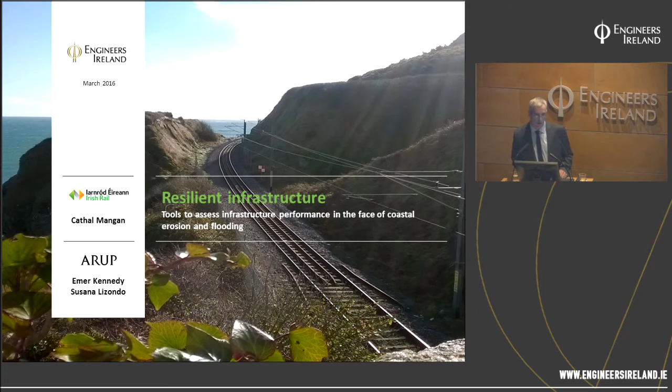And as I say, the impacts on the infrastructure can be quite substantial, no more so demonstrated than in the last winter period. We'll talk about that in a moment.

So just in general, the context of the presentation is straightforward. I'm going to give a little background to the project and an introduction to the context in terms of Iarnród Éireann and the infrastructure involved. Then I'll hand over to Emer and to Susana, who will talk in more detail about the two specific pieces of research done, around the development of tools for supporting decision making around coastal erosion and flooding, and how those tools help in strategic decision making and in things like investment and prioritization. The presentations will also afford time for conclusions and discussion afterwards.

So generally, a bit of background to the project. It was developed and evolved from an Arup-funded, internally funded mechanism, and was carried out in collaboration with Iarnród Éireann.

Specifically, the aims of the project were focused on two areas of research: coastal erosion and flooding. The objectives were to develop tools to help assess vulnerable areas on the network with respect to coastal erosion and flooding, and to support our own decision making in terms of those.

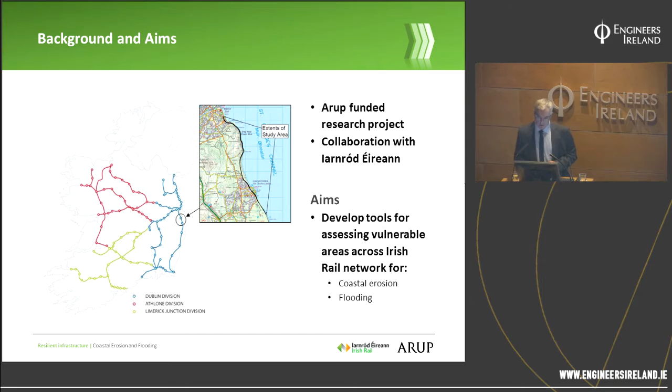The extent of the study picked a representative area between Bray and Greystones, an area significantly prone to the impacts of both coastal erosion and flooding, as we've seen over the last number of years. The objective of the scope was that we could use this as a test area, with the aim of applying the tools we develop to other areas of the rail network.

So a brief context to the project from an Irish Rail perspective, as the infrastructure manager. When we started scoping the projects in detail and developing them, we quickly came to the conclusion of the value of coastal erosion and flooding as areas of research worthy of developing support tools.

That was early in 2015, where we defined the detailed scope. We then had the winter of 2015 into the new year of 2016, where there were significant impacts, not just on railway infrastructure, of course, but only a few weeks ago we remember the impacts on infrastructure throughout the country. Irish Rail was significantly impacted by that as well.

So I'm just going to illustrate that with images of the damage caused on our infrastructure, and how that lent itself to the development of the tools in the research projects we undertook.

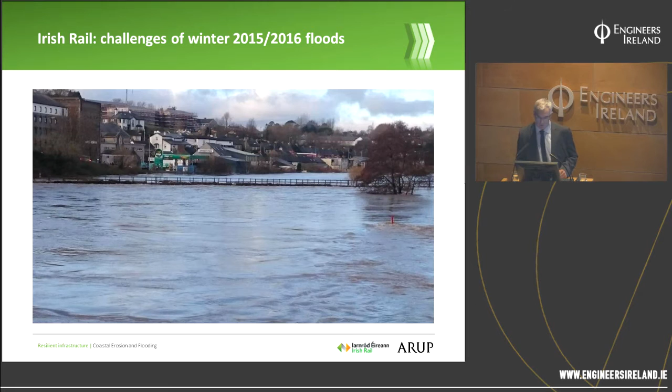So that was particularly important around this asset, not only from an operational point of view, but also from the benefit that can be accrued in terms of development of decision support tools.

There's another picture of Enniscorthy, again showing the extent of the flood levels, and you can see beyond it the further extents where the water levels are not far from the top of the platform level. Again, it highlights the severe extent of the flood events over the winter and Christmas and New Year period recently gone by.

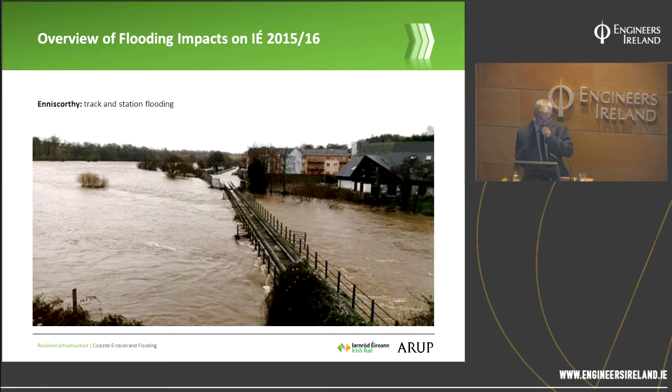Another feature of the flood events was not just the sustained nature of them—and it was very sustained and relentless over a number of weeks—but also the types of flooding we were exposed to, ranging from fluvial, pluvial, to coastal erosion. We seem to get all impacts throughout the network at various locations and of various types.

One of the things very evident from the winter period just gone by was the rate of erosion was absolutely huge, and we've noticed over years that it seems to be continually increasing at an accelerated rate. In fact, in some coastal areas along the east coast, we've lost up to 32 metres over a 4-year period. So it really is a major issue for us, more so exacerbated by the winter period.

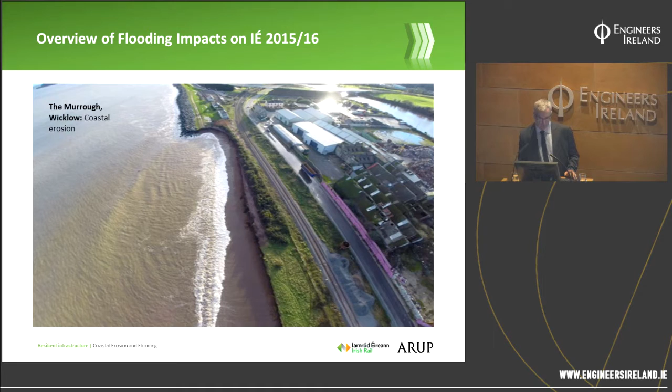One of the most notable aspects was how sustained in nature and significant these impacts were. So while the scope of the projects and research were being developed, we decided very early on that they were relevant and good topics to invest in. I think that decision was further compounded by the winter period just gone by, which really demonstrates that coastal erosion and flooding are huge and hugely impacting issues for us, and demonstrates the value in the collaborative research we've undertaken with Arup.

And hopefully now we can demonstrate the value of the research itself. Emer and Susana are going to take us through the two specific projects of flooding and coastal erosion. Just before I hand over to Emer, I do want to express thanks to Arup in terms of the development of this collaborative research.

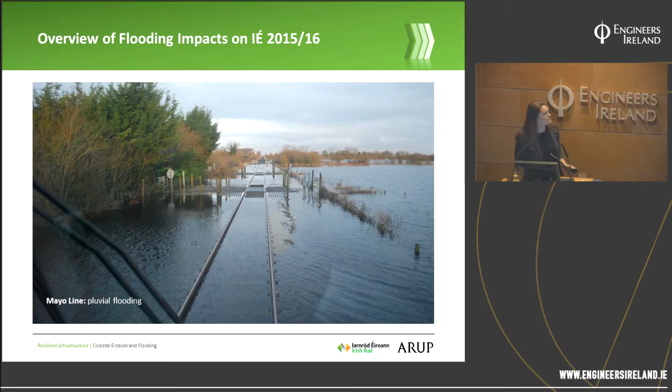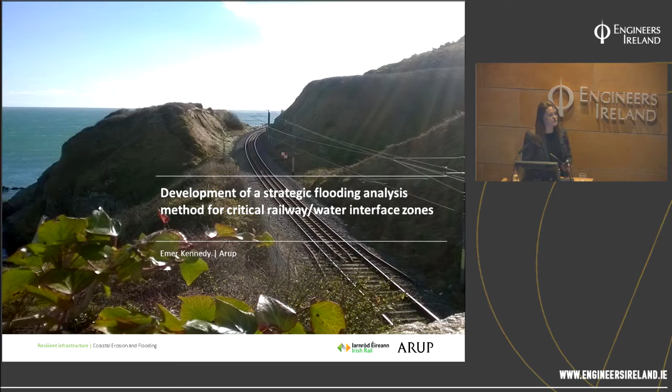Good evening. My name is Emer Kennedy. I'm a senior water engineer in the Arup water team. My role in this was to oversee the research into the interface between external flooding and the rail corridor.

For this project, we looked at two aspects: flooding from the external catchments and also flooding on the rail corridor from rainfall events. As Cathal mentioned, we chose the study area of Bray to Greystones. In choosing this area, we got together with the coastal research team and Irish Rail to figure out what study area we could apply the same study to, so we could compare results at the end. We also wanted a research area representative of the majority of the Irish Rail network throughout the country. This catchment had mountainous areas around Bray, then lowland agricultural area, before ending in the urban area of Greystones.

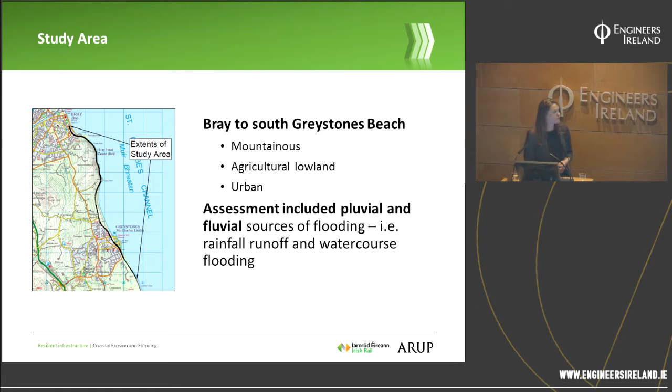We looked at the pluvial and fluvial sources of flooding and how they interact with the rail corridor. The aim of this project is a high-level assessment to create a tool to rapidly assess large sections of the rail corridor, and from this prioritise where further investigation is needed. In broad terms, the research steps were: the desktop study, which informed our targeted site visit, followed by a hydrological and hydraulic assessment. We then analysed our outputs and presented them in a colour-coded risk matrix format, and compared this with the research conducted by the coastal research team. I'll go into each of these in more detail now.

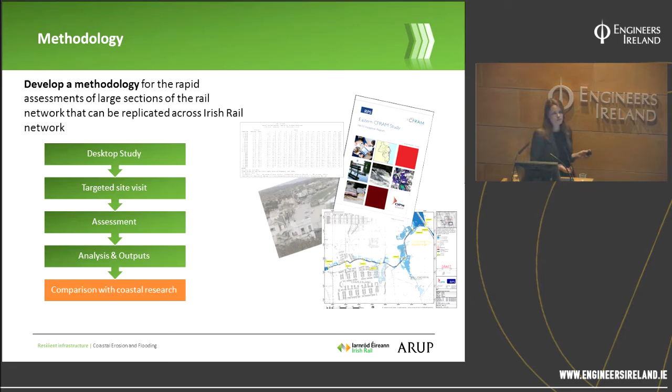For the desktop study, we first reviewed publicly available information, such as the Office of Public Works Catchment Flood Risk Assessment and Management Study, which is available online. We also looked at historical information from the OPW Flood Maps website, then the Met Éireann rainfall data for both Bray Head and Greystones Beach. Even though it's a small catchment, we needed to get a feel for the difference in rainfall patterns between the mountainous Bray Head region and the low-lying Greystones area.

We also received a large body of data from Irish Rail, including culvert inspection records, topographical survey, and survey of existing utilities within the rail corridor. We then looked at the OSI mapping data, which you can see on screen here. From this, we were able to quickly map the external catchments and determine where we'd assume there would be a point inflow into the rail corridor. We compared this with the Irish Rail inspection records and culvert data to see if it correlated with culverts on the ground. More often than not it did, but we found a couple of instances where we needed further investigation, so these were high priorities in our site visit.

We also looked at potential flood mechanisms, which was one of the main inputs into the targeted site visit. As part of that, we reviewed the topographical survey provided by Irish Rail, identified low points in the rail corridor, and identified these as potential sources of ponding. We then mapped all of this data, as you can see here on the left, and this was what we used for going to site. With this method, we were able to cover quite a large section of the rail corridor in a brief amount of time—about 2 hours to review the 6 kilometres of the study area.

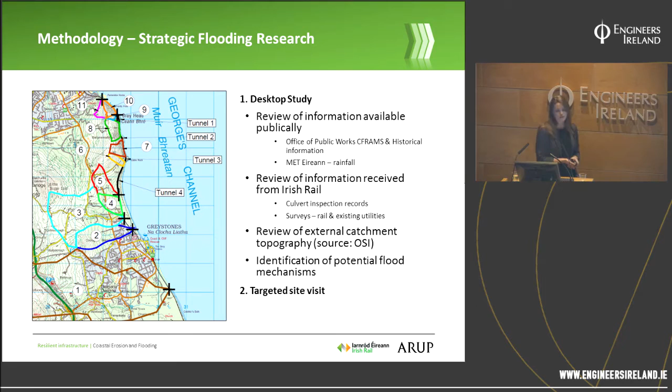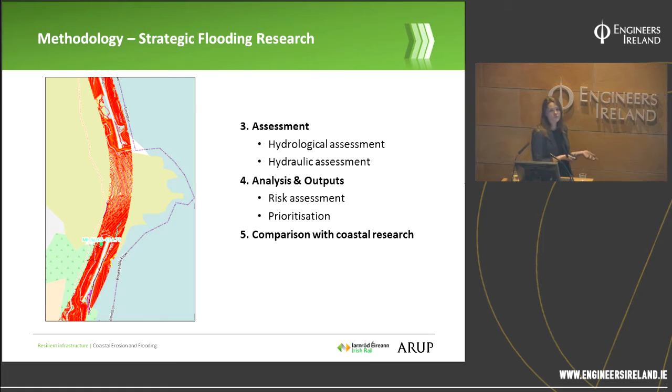Here's a screen grab of some of the survey. Irish Rail actually maintained quite an extensive amount of topographical survey, covering approximately 50 metres width of rail corridor. I'll go into this in more detail shortly, but this was a key input into our pluvial analysis of rainfall runoff in the rail corridor itself.

First, for the assessments, the hydrological assessment of the external catchments. As I mentioned earlier, we looked at the OSI mapping to look at the topography of the external catchments and determine where those point inflows were.

We then came up with our assessment criteria by a desktop review of comparable studies and came up with our criteria of a 1 in 10 year ARI event and a 1 in 30 year ARI event, and finally a 1 in 100 year being a more critical storm event.

We estimated the runoff from the external catchments based on 3 methods depending on catchment size. This is using the Agricultural Development and Advisory Service for catchments less than 0.4 kilometres squared, right up to the FSU web portal for catchments greater than 25 kilometres squared.

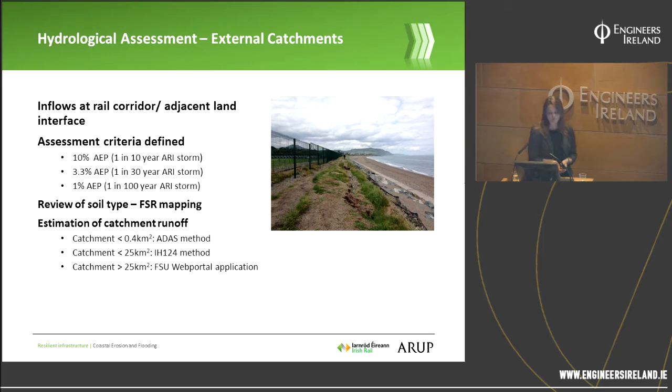From this, we worked out and had a look at the culverts that we had data on to assess their performance. Again, this is a high-level assessment of the culvert performance based on the CIRIA guidance.

The criteria for pass in this instance was the headwater level upstream of the culvert. If it was above the soffit level of the culvert, it warranted further investigation. At this point, we compared the headwater level with the top of rail level.

We also compared this with the results of the Floodflow analysis, which was our assessment of the rainfall profile over the rail corridor. In some cases, this indicated where there could be ponding along the track, but it also showed where there would be ponding adjacent to the track. For this study area, that is generally on the land side of the rail corridor. Again, this generally did correspond with where we had identified the point inflows.

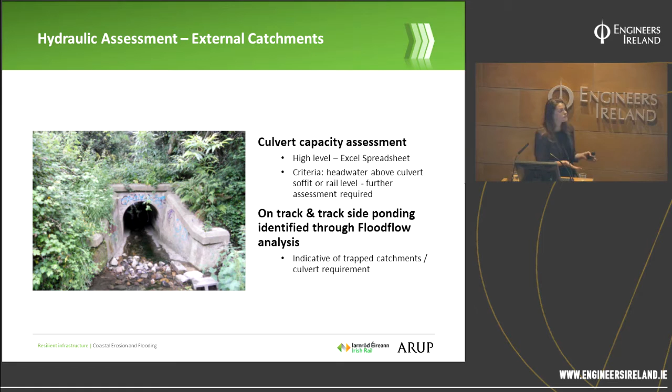So this is a typical output of that assessment of the culverts, just giving you an image of the headwater level relative to the soffit or the rail level.

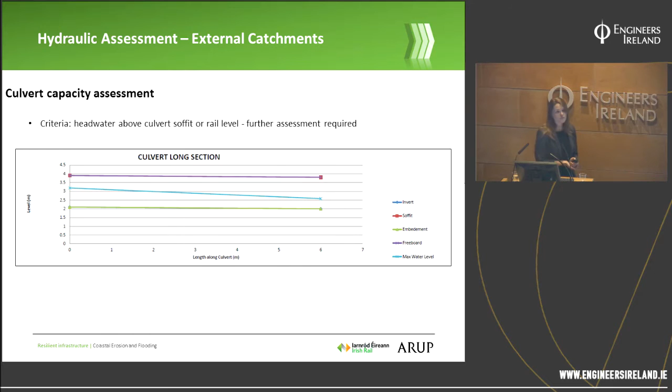Now the rail corridor, as I said, there were 2 aspects: external drainage, which was based on the OSI mapping and looking at the point inflows and sheet inflows. The other aspect is looking at the rainfall, the impacts of rainfall directly onto the rail corridor itself.

So for this, we prepared storm intensity data. We received storm intensity data from Met Éireann and prepared our IFD curves. We also considered climate change and factored it up by 20%.

We then used the Floodflow, which is a suite of the microdrainage WinDes software, where you can apply synthetic rainfall over a topographical area and assess how that rainfall behaves, where it ponds, and at what frequency it ponds and severity. One aspect of this was we had to determine the critical duration of the storm.

We decided to choose a baseline critical duration to make the studies relatively quickly comparable, so that if you have an impact in one area, it could be quickly compared to another area, allowing prioritization to be applied. In general, we found that some of the internal rail corridor catchments were quite long, so because of this, we decided a 1 hour duration would be appropriate for a baseline study.

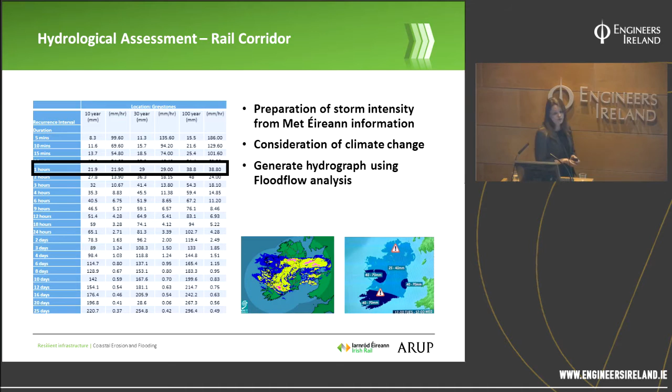The low impact ponding of 100 mil doesn't necessarily translate to visually 100 mil of ponding above rail level. This is more indicative of where the water will filter through the ballast and sit on the subformation. It's low impact because it's not going to cause rail stoppage, but it is an impact because if it's a higher frequency event over a longer course of time, this can cause damage to the subformation or cause an ingress of fines into the ballast.

The higher impact then on the other end is a 600 mil depth. We looked at the void ratio and the typical depth of ballast in the Irish rail network, and took this to translate to about 100 mil above top of rail, and this is enough to trigger a rail stoppage. So this would be seen as quite a severe impact.

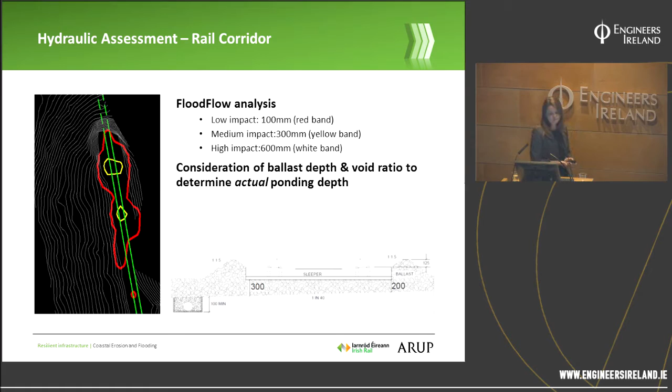So from all of this, the risk ranking is quite intuitive: if it's a more frequent event with a higher depth of ponding, it will be considered a very high priority. Then if it's a less frequent event with not as much ponding, it's a lower priority.

In terms of how the culverts interact with this, as I said, we generally found where the landside ponding adjacent to the rail corridor from the flood flow analysis happened, it generally coincided with the culvert. We would look at that culvert and that ponding location and determine if the culvert was performing. If the culvert wasn't performing on our high level assessment, then we would definitely trigger further investigation.

There was also an instance from our site walkover where we couldn't immediately find the culvert. That would automatically trigger a high priority assessment because we couldn't carry out a proper assessment of it. But further investigation could indicate that the culvert is in place.

I'll go through some of the risks Cathal covered earlier, but more specific to the impacts of ponding. The severe impacts would be rail stoppage, while the lesser impacts could be longer term damage such as ballast fouling.

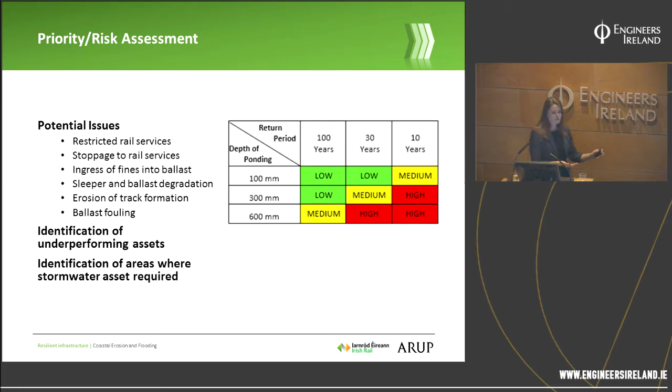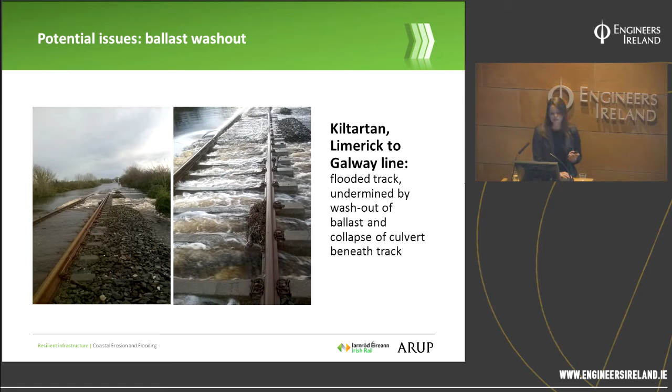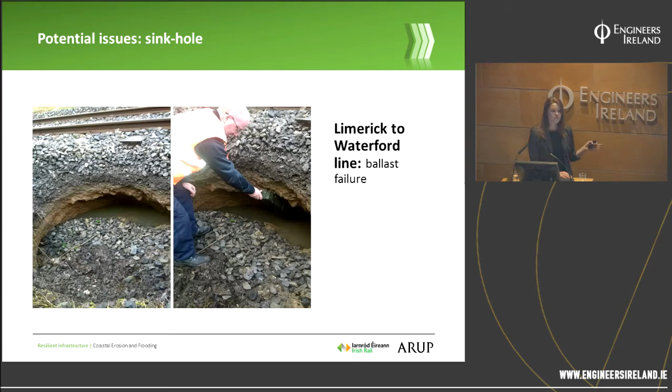This is basically ballast washout. This is a sinkhole on the Limerick to Waterford line. This could be caused by a low level of impact over a longer duration, ultimately causing the subformation to fail, and this would have quite a severe impact.

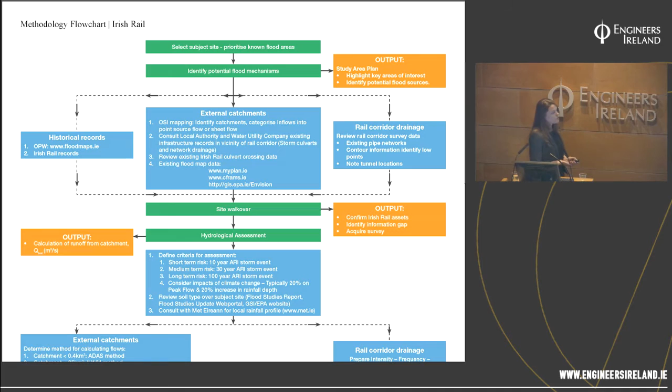This was of both the external catchment and the internal rail corridor. The external catchment looked at different methods of estimating your Q10 to Q100 flow rates, and in the internal area, it looked at the intensity, frequency, duration curves and applying a factor of climate change.

The hydraulic assessment then, for the culverts or bridges, just used CIRIA guidance, giving consideration to your upstream and downstream boundaries such as tidal influences. For the rail corridor drainage, as I've described, we used a flood flow suite from Microdrainage.

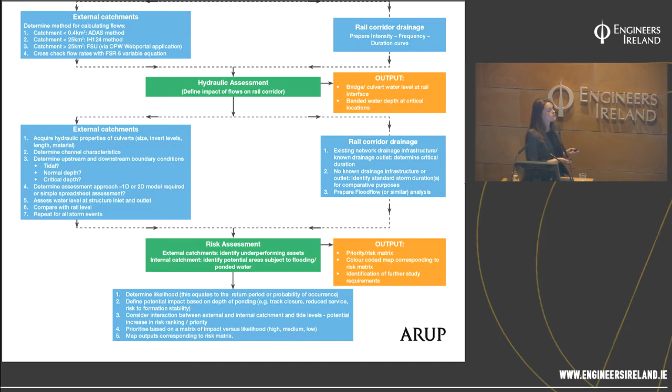Finally, from all of this, we compiled a risk assessment and graphical outputs. The conclusions from the study were that we were able to identify areas where more research would be required as a higher priority. We found that an asset register recording information specific to a drainage engineer or someone looking at flooding impacts would be valuable. This is just a quick sample on the bottom.

The Iarnród Éireann GIS database proved to be a very useful source of data. They have a huge wealth of information in-house. However, we found there could be some changes to make it slightly more user-friendly, or to contain more relevant data specific to that culvert. We'd also recommend that this be applied on future assessments based on the methodology flowchart presented earlier.

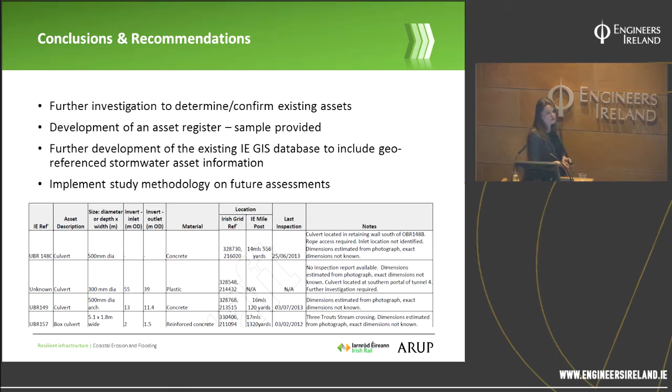Good evening. My name is Susana Lizondo. I'm a senior maritime engineer working with Arup in the maritime group. I'm going to describe the coastal research that we did in collaboration with Irish Rail.

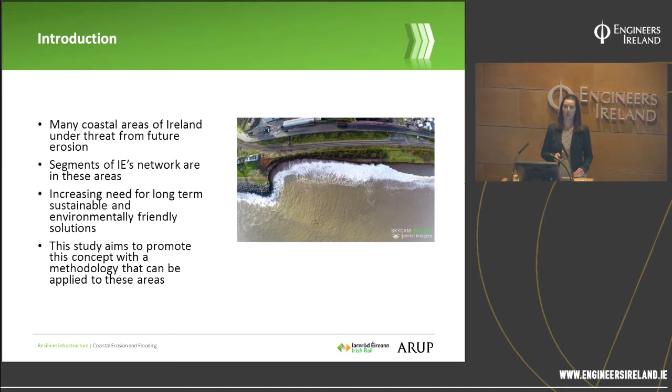At the same time, we have the need to assess more environmentally friendly solutions for these kinds of coastal problems, and we should aim to promote other kinds of solutions.

We can see in the image the big damage which happened, and the progression. You can see the importance of that sudden slide which happened in a very short period of time. In this case, the failure happened beside an existing revetment, which is a typical situation in coastal engineering, where the adjoining area is very soft, and at the end of your revetment you have a point of failure.

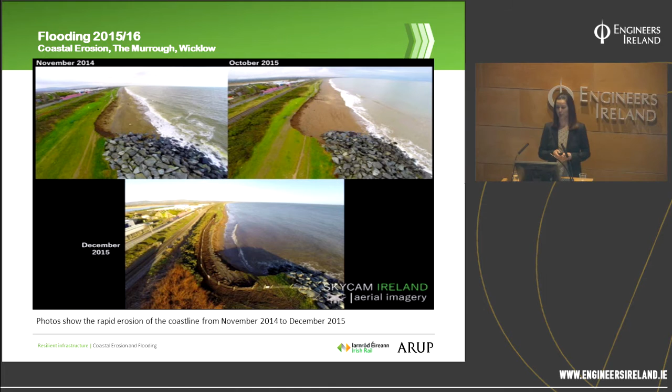The methodology we followed for this study consisted of different stages. First, we collected all the existing data around all the areas that Irish Rail provided us with. Then we did a workshop with Irish Rail and with our experts - railway experts, geotechnical experts and flooding experts - and we tried to define which would be the best area to focus the study on.

We decided that the area, as Emer was mentioning before, would be from Bray to Greystones, South Beach. After that, we did a couple of site visits with our geotechnical experts and then the maritime experts. We assessed all the information compiled in both site visits, previous studies, and our own research, and then we came up with the assessment.

As Emer just mentioned, our area extends from Bray to Greystones, South Beach. The reasons from the coastal point of view to select that area are that this area is plenty of coastal assets which need to be protected, and also that Arup had extensive knowledge of this area because we have done so many projects here in the past.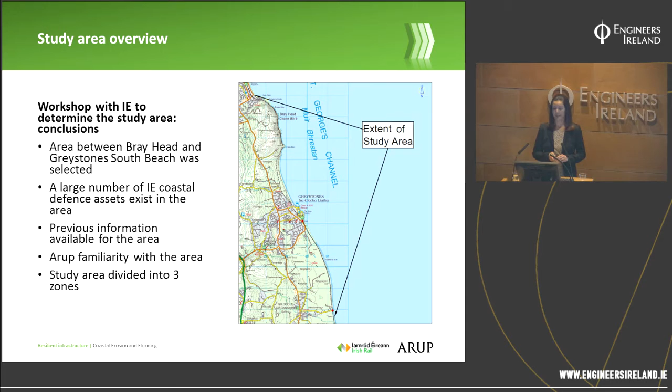So then we proceeded with the study. For the study, we divided the area into three different areas, according to their coastal features. The first area would be Bray Head, which is a rocky headland. This area had many troubles in the past, including big important geotechnical failures.

As you can see in the image, that's a redundant tunnel which is not used anymore. This area has a number of coastal assets to protect, and it was upgraded in 2002, where a number of revetments were upgraded.

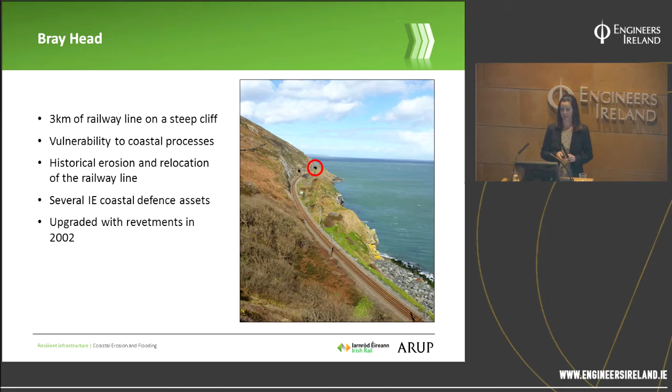Next area is Greystones, North Beach. We can see in that image one line showing the predicted retreat for the year 2050. This line and image comes from the Irish Coastal Protection Strategy. We can see that for that year, the railway line, which is actually located quite far from the coastline, will be affected. It's important to mention that this study did not take into consideration climate change.

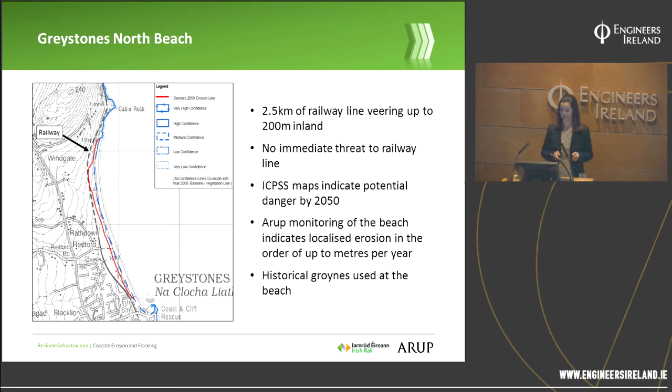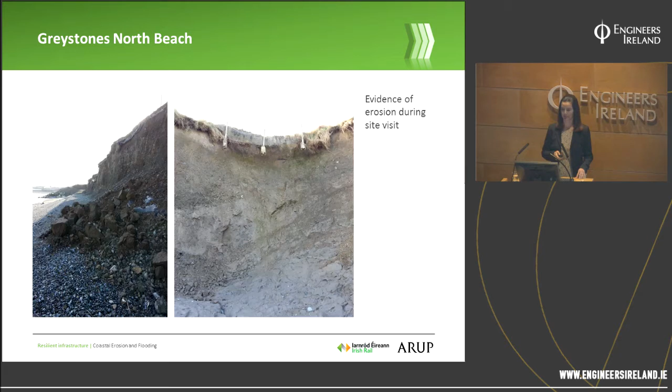Then Greystones South Beach. In this area, the challenge is that the railway line is really close to the seaside, so it's subject to both overtopping and coastal damage. This part of the railway line was already relocated in 1912, and right now it's facing some overtopping, as I just said. The Irish Coastal Protection Strategy also indicates some predicted coastal retreat in this particular area.

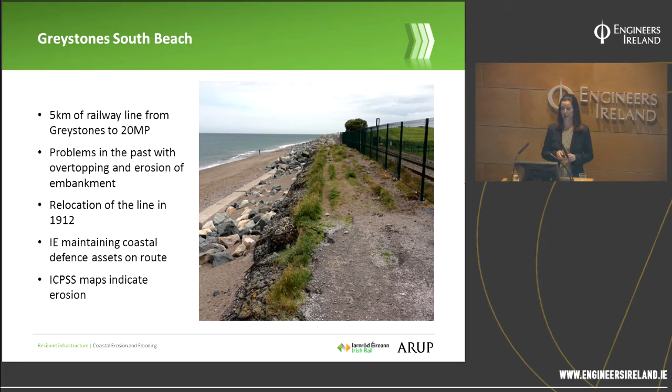Then we were talking about climate change, so in this image I'm just trying to summarize the key effects and how exactly climate change is likely to affect our coastal areas.

If you look at the image coming from the sea, you can see that sea level rise is likely to bring some increase of storminess. That means we are likely to have higher wave heights and more frequent ones. That increased wave action is likely to cause further erosion of the coastline, and the levels of the beach and seabed go lower, which will also accelerate the wave action. All of that will lead to increased coastal erosion, which is a risk for the railway line.

Coming from the land side, we can see that climate change is likely to bring more erratic and more frequent rainfall, which will lead to increased weathering and more likely landslides. So the risk to the railway line will be affected from both sides, land side and seaside.

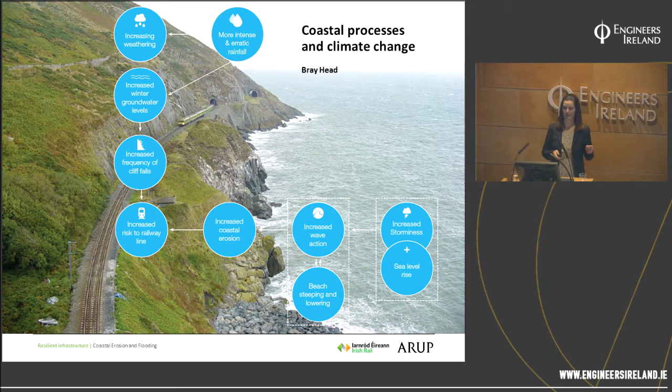We can see a similar situation for the Greystones North Beach, which will be our next area. In this case, the difference is that the cliffs are much softer because they are made of clay and sands, but the situation is very similar. So we can see the risk coming from the seaside and also the land side.

Finally, for Greystones South Beach, the situation again is very similar, but in this case climate change will bring direct effects on overtopping and increase the overtopping rate, given that the railway line is really close to the seaside.

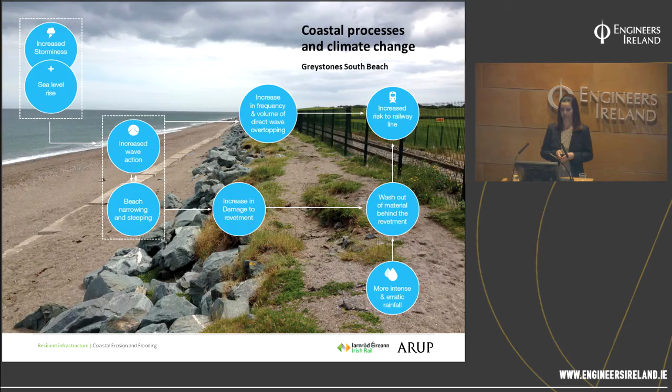When talking about coastal solutions, we as coastal engineers have a wide range of solutions which could be applied. These solutions range from very soft solutions like planting or beach nourishment to much harder solutions such as typical revetments, groynes, or even wave and flood walls.

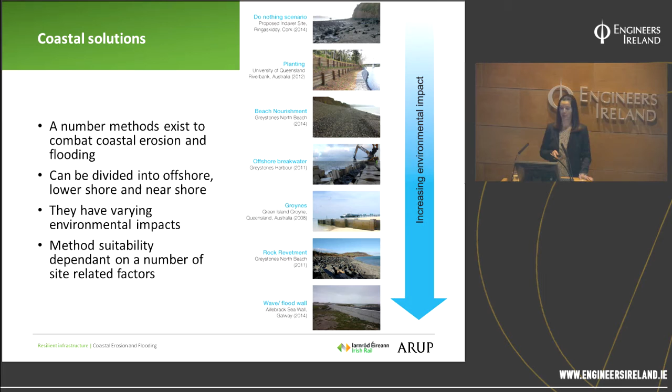These solutions have different environmental impacts, ranging from do-nothing and planting, which have very low environmental impact, to hard solutions such as flood walls, which have a really big impact. So there are a number of factors which make us decide about these solutions.

How do we select between these solutions? Well, the first thing would be to try to assess the offshore wave climate. With this, we assess the offshore wave conditions, how frequent the wave conditions come from one direction or another, and also the kind of return period associated with each wave height.

Once we have the offshore conditions, we have to transfer these conditions near shore, since we really need to know what's happening in our near-shore area. We usually transfer these conditions using numerical wave propagation software. In this case, at Arup we use MIKE21 Spectral Wave. For this case, we didn't do a numerical model because we had previous information for this area, but this would be the normal procedure.

Once we have the wave conditions near shore, we assess geotechnical conditions, sediment transport conditions, which are the boundaries of our site. And of course, we take into consideration functional requirements, which is really why we need coastal protection in this particular area.

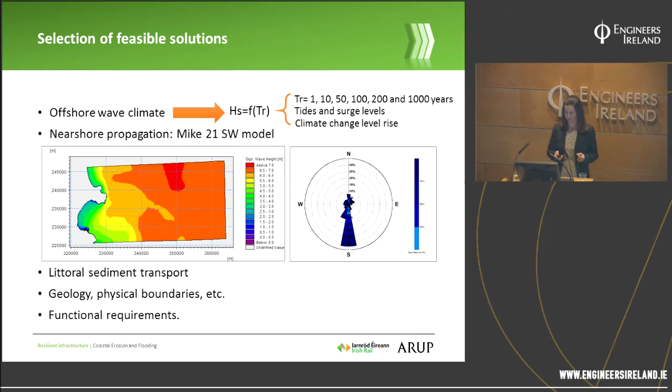For the option assessments we did for this study, first we generated a short list of options for each of the areas, and then we defined a number of criteria which we would use to define a preferred solution. In this case, since we are trying to give big importance to environmental conditions, we defined the fact of a solution being environmentally friendly as very important.

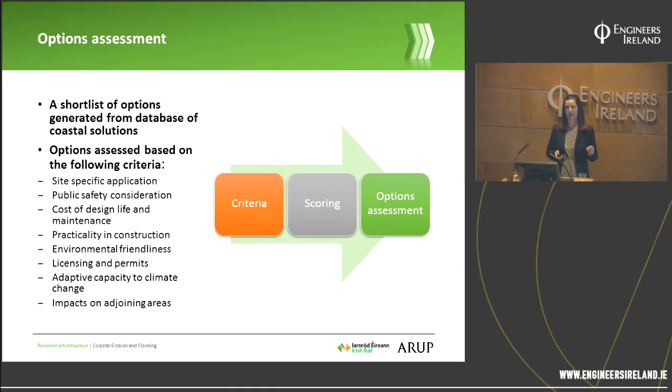We also tried to promote the concept of climate change resilience, because as we see it can be a challenge for coastal structures, so that was another important factor. Other factors included how site-specific the solution is, public safety, and as you can see on the screen, licensing and permits, practicality in construction, and the impacts on adjoining areas. Then we gave a weight to each of these criteria, and qualified each criterion against that value.

I just mentioned environmental considerations, and for this particular area we have to bear in mind that it is really well protected with a number of different designations, like Special Protection Area or natural heritage area, so that will be a key factor to take into consideration for the assessment of possible solutions.

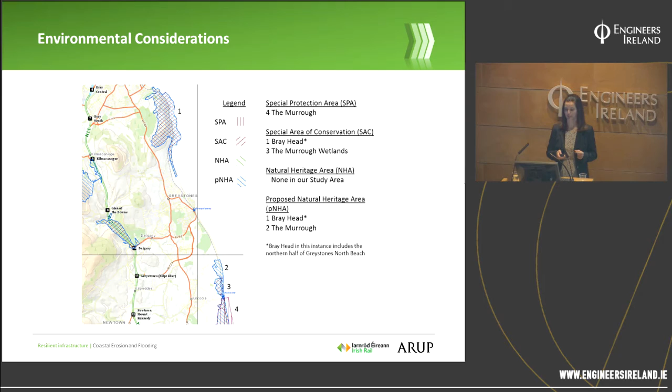Planning, consent, and licensing is also a challenging issue, in the sense that our solution can be quite constrained because of the licensing needed for adoption. For example, any kind of solution involving work in the foreshore will involve extensive public consultation and the need for a foreshore license. So that's a factor we have to bear in mind, needless to say about environmental considerations and the need for an EIS.

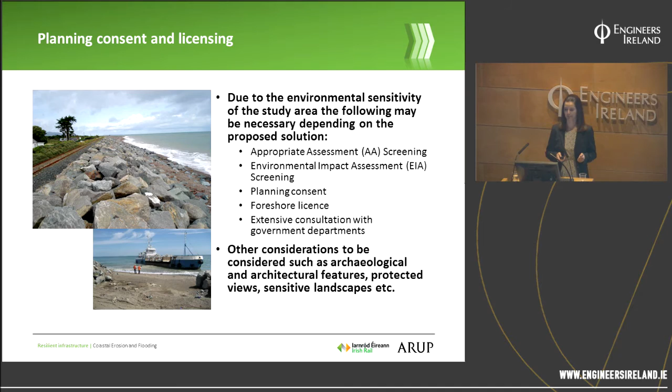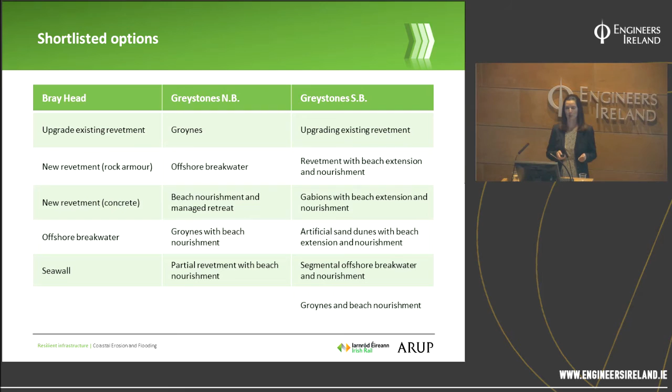Applying this procedure to the three different areas described before, here is a list with the short list options. We try to combine two different kinds of options. For example, we combine harder solutions, like groynes or revetments, with softer solutions like beach nourishment, since we are really trying to enhance natural options.

Just to focus on one of the areas so you can follow the procedure, this is the scoring for Greystones North Beach. We gave a score ranging from 1 to 5, where 5 means the criteria is totally met and 1 that the criteria is not met. So we can see, for all the criteria defined before, the scoring we gave for each of the short list options. In this case we have 5 short list options, and here are the scores.

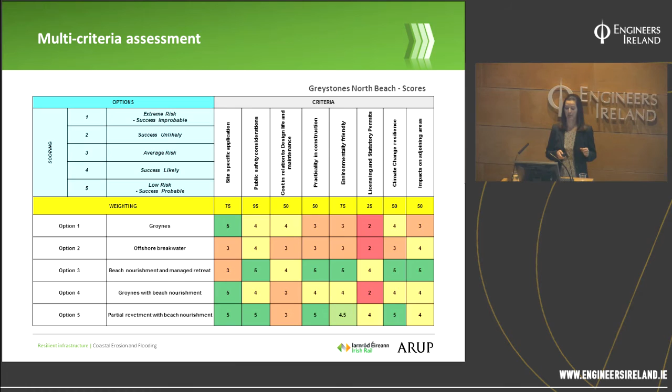Here are the scores after weighting with the criteria. This weighting was based on previous Arup experience and tailored for this specific situation, where we tried to highlight the environmental aspects. Of course this criteria can be modeled in relation to the project we are working on. In this case, the preferred solution after following this criteria was the partial revetment with beach nourishment.

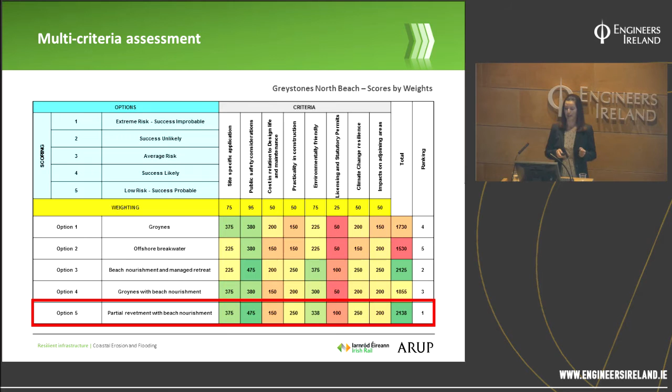For the other areas, I'm summarizing here the different options which were selected. For Bray Head area, the preferred solution consisted of upgrading the existing coastal assets, just because there were a big number of them, and they were meeting the functional criteria by protecting the head, which is what was intended. This solution would be cost effective, and it would need a minimum of licensing and permits.

For Greystones North Beach, as we just saw in the recent table, we were proposing a partial revetment with beach nourishment. The partial revetment will fix the shoreline, in the sense that it will slow its erosion rate and provide a natural aspect. We're proposing a revetment only at the toe of the cliffs, complemented by beach nourishment, so it will be a natural solution with a nice visual impact, and it's also practical to construct.

For Greystones South Beach, the preferred solution was a revetment with beach extension and nourishment. With this solution, we will get a big surface in front of the existing revetment, leading to a more protected area. The railway line will be protected against overtopping, and we will also increase the recreational area, so the community could benefit from this solution.